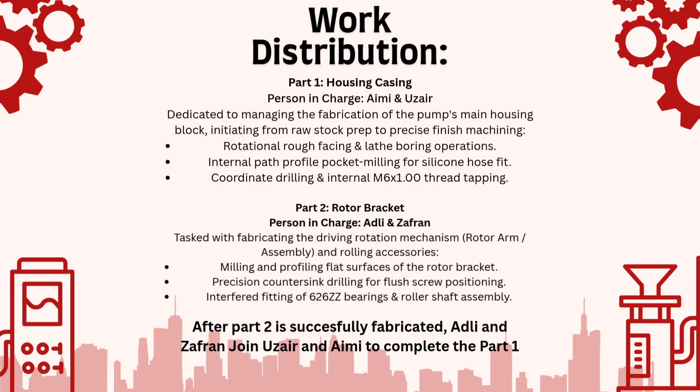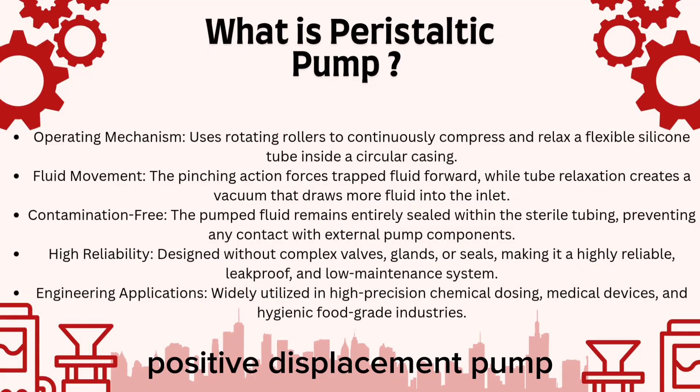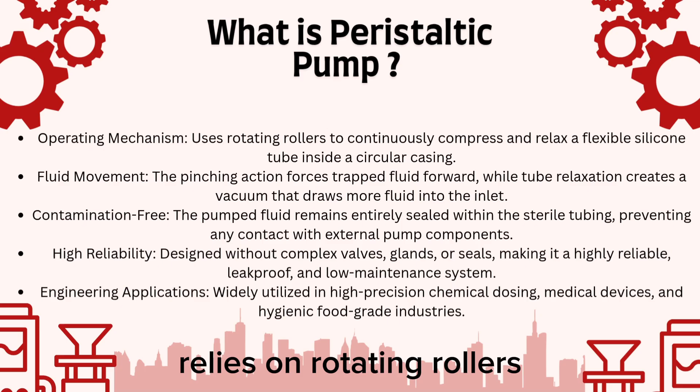What is a peristaltic pump? It is a highly efficient positive displacement pump designed to transfer various fluids safely through a flexible, specialized silicone tube. The operating mechanism relies on rotating rollers that continuously compress the tubing inside a circular casing.

As the rotor turns, the pinched portion of the tube forces the trapped fluid to move forward, while the subsequent relaxation of the tube creates a vacuum that draws more fluid into the inlet.

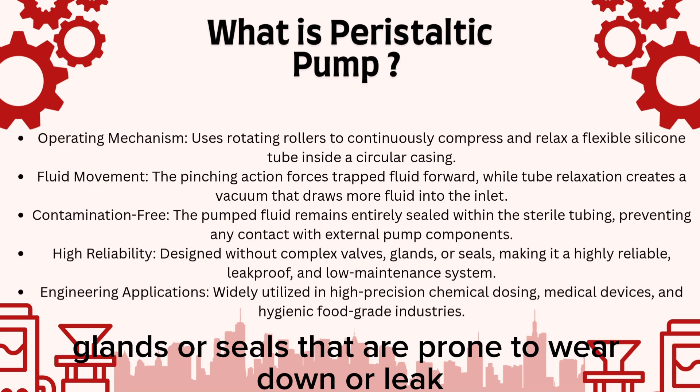The primary engineering advantage of this design is that the pumped fluid remains entirely contained within the sterile tubing, completely eliminating any risk of contamination between the fluid and the pump components. Additionally, because there are no complex valves, glands or seals prone to wear or leak, it represents a highly reliable, low maintenance system widely used in precision chemical dosing, medical device, and hygienic food grade applications.

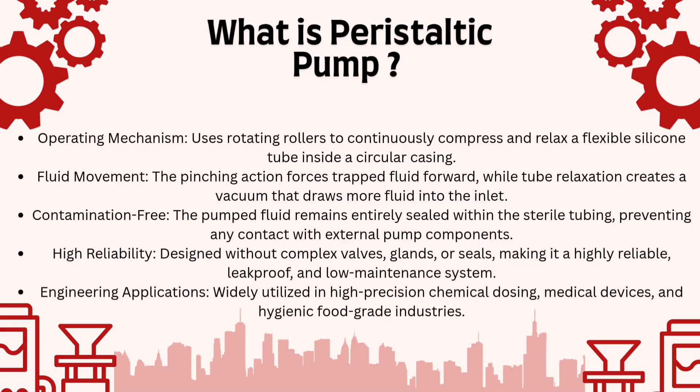Moving on to our project mission and learning objectives. This slide outlines exactly how we bridge theoretical engineering with hands-on workshop execution, focusing on 4 core competencies.

First, manufacturing planning. Our first objective is to take standard 2D engineering drawings and systematically convert them into a structured, step-by-step mechanical machining sequence. This ensures we have a clear operational roadmap before touching any machinery.

Next is physical fabrication. The ultimate mission here is to manufacture a highly precise, working physical pump assembly built entirely from mild steel raw stock. To achieve this, we will focus on skill integration.

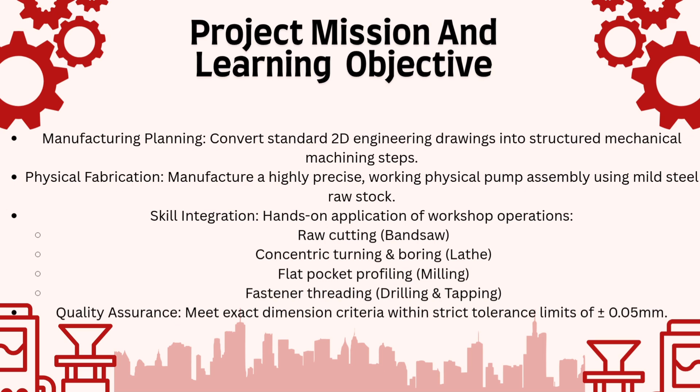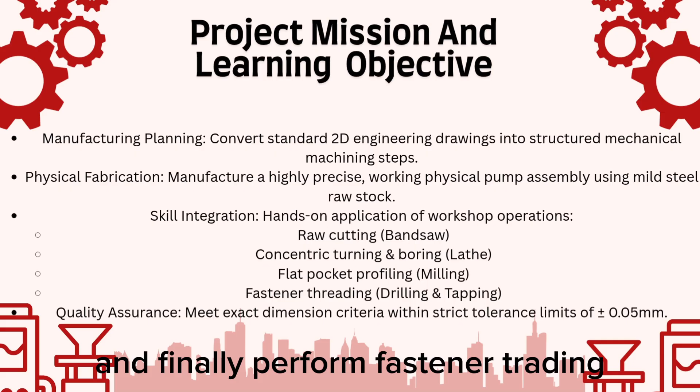This project requires the practical, hands-on application of several workshop operations. First, we start with raw cutting using a bandsaw. Then move to concentric turning and boring on the lathe to handle cylindrical geometries. We utilize the milling machine for flat pocket profiling, and finally perform fastener threading through precise drilling and tapping.

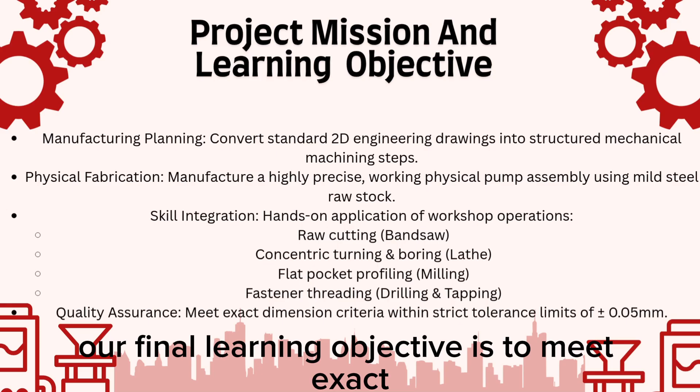Lastly, quality assurance. A working pump requires absolute precision. Therefore, our final learning objective is to meet exact dimensional criteria within a strict tolerance limit of plus or minus 0.05 millimeters. Alright, next, Zafran here, and I'll be explaining the safety equipment and techniques.

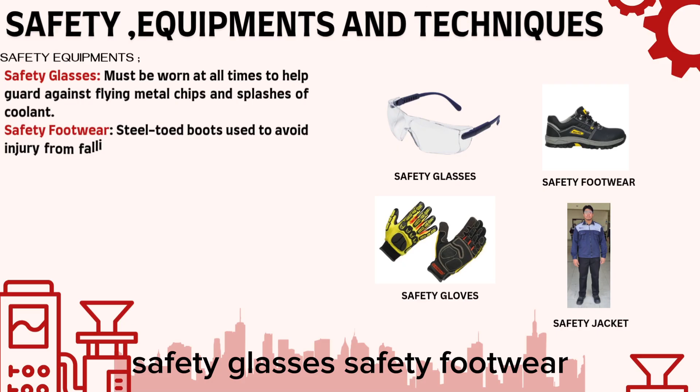For safety equipment, we have 4 items: safety glasses, safety footwear, safety jacket, and safety gloves. Safety glasses must be worn at all times to guard against flying metal chips and splashes of coolant. Safety footwear, steel-toed boots, are used to avoid injury from falling or heavy objects.

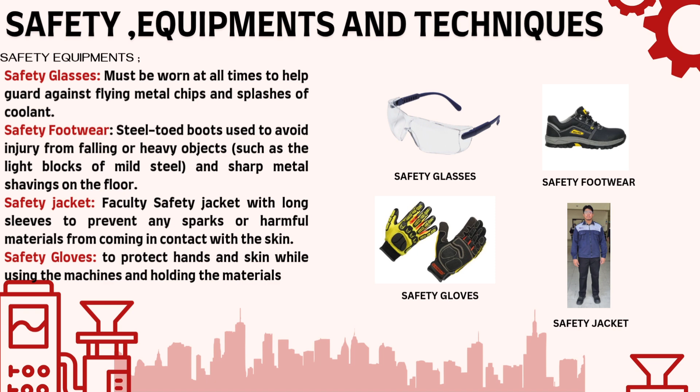Next, safety machining techniques. For lathe safety, always take off the chuck key after chucking the workpiece. The key can never be left in the chuck.

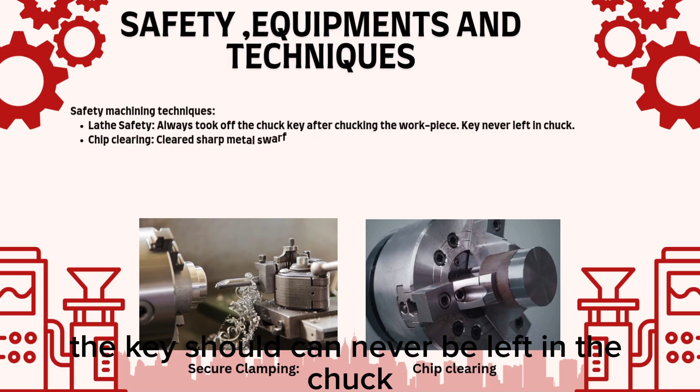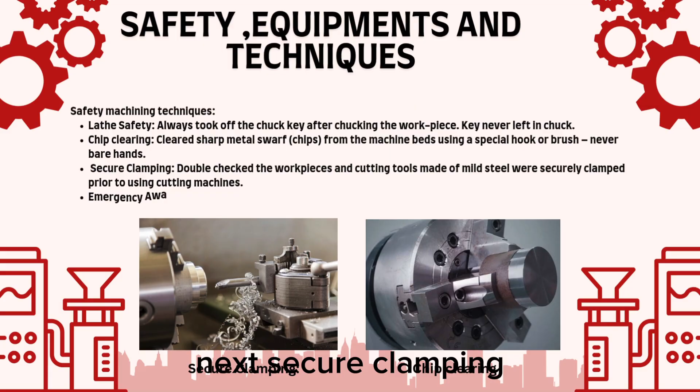Next, chip clearing. Clear sharp metal swarf chips from the machine beds using a special hook or brush. Never use your bare hands. Next, secure clamping: double check the workpieces and cutting tools made of mild steel were securely clamped prior to cutting.

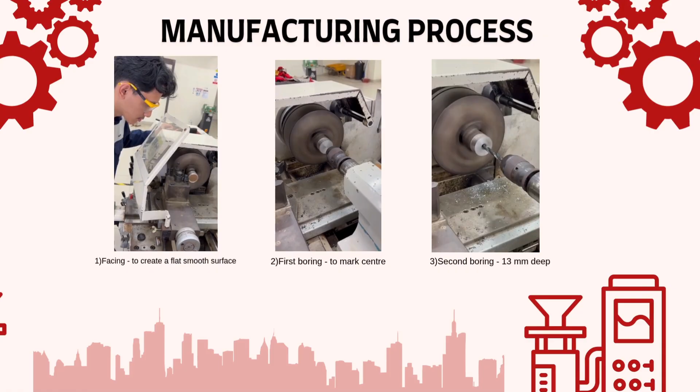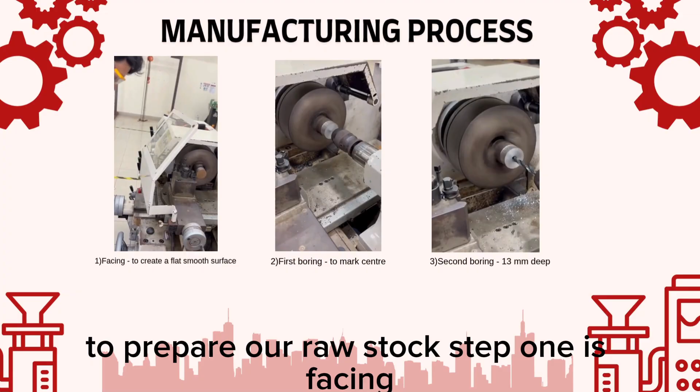Let's walk through the actual manufacturing process we execute on the lathe machine. The initial fabrication phase consists of 3 foundational steps to prepare our raw stock. Step 1 is facing. We begin by performing a facing operation.

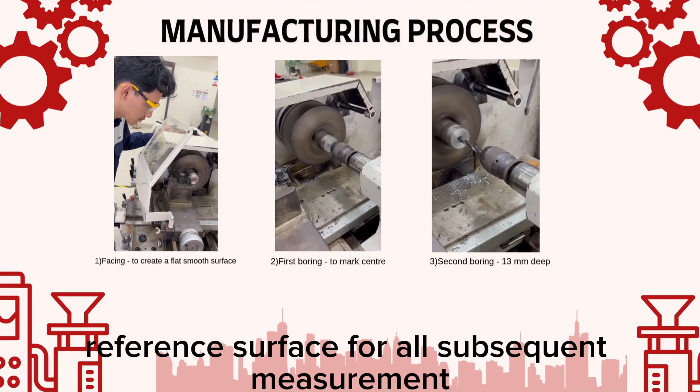The primary goal here was to clean up the uneven end of the raw stock and create a perfectly flat, smooth reference surface for all subsequent measurements. Step 2 is the first boring operation.

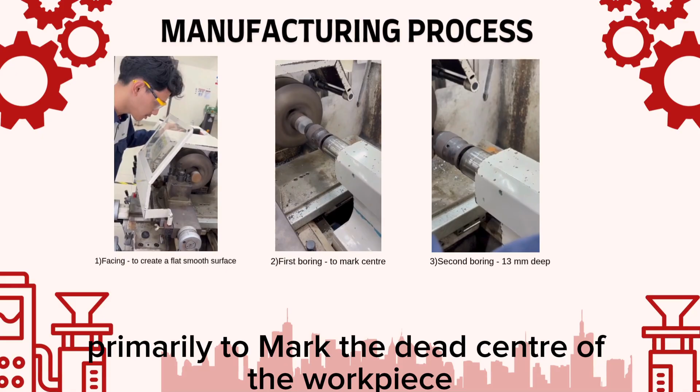Once the facing was through, we used an initial boring step primarily to mark the dead center of the workpiece. This acts as a critical guide to prevent any tool deflection later on.

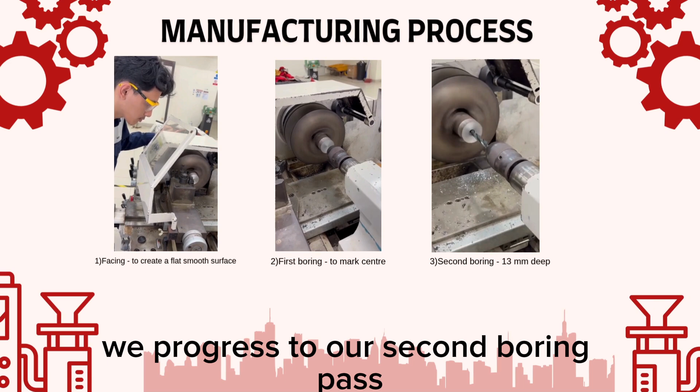Step 3 is the second boring operation. With the center securely marked, we progress to our second boring pass, machining into the workpiece to an exact depth of 13 millimeters.

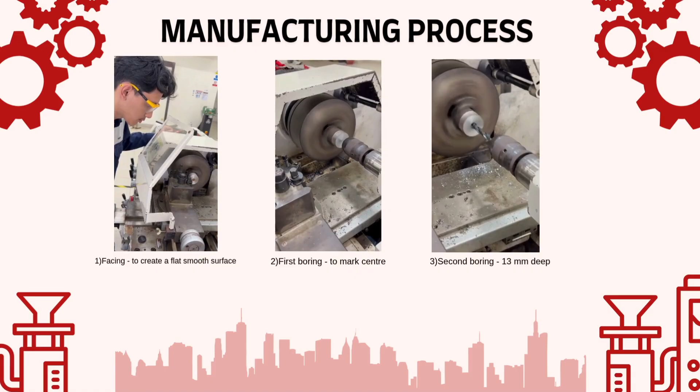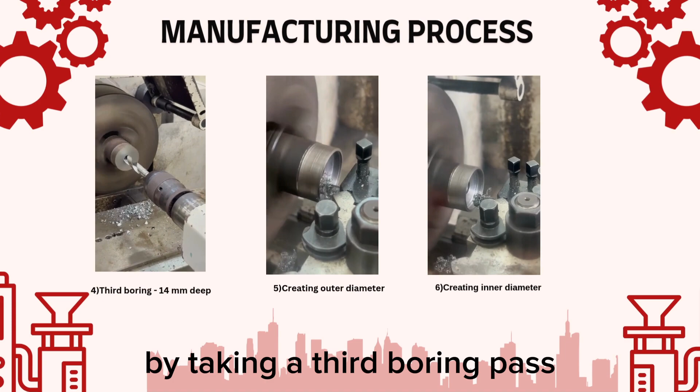Step 4 is the third boring operation. Here, we fine-tune our internal depth by taking a third boring pass, extending the internal cavity just slightly.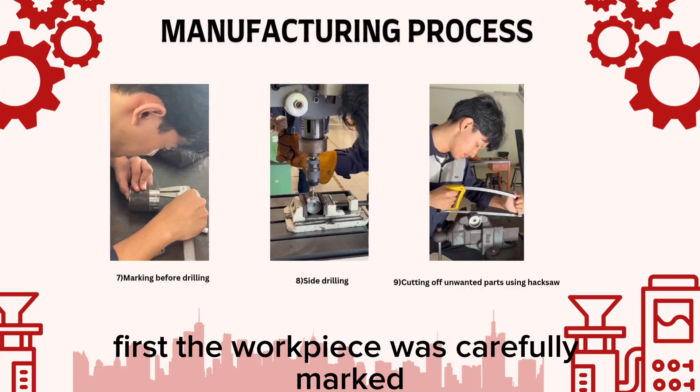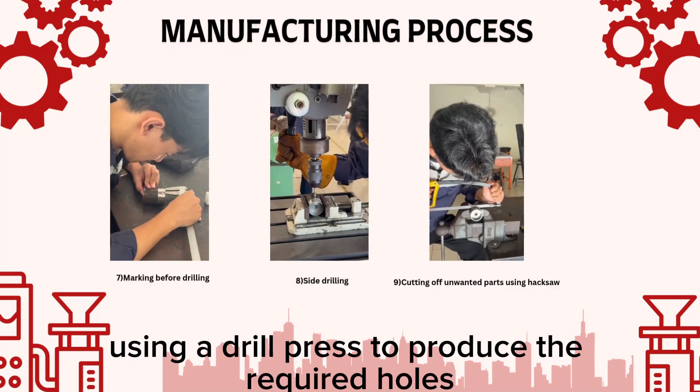After completing the initial machining process, we proceeded with the next manufacturing steps. First, the workpiece was carefully marked according to the dimensions in the design drawing to ensure accurate hole locations before drilling. Next, side drilling was carried out using a drill press to produce the required holes while maintaining proper alignment.

Finally, the unwanted portion of the material was removed using a hacksaw. This prepared the workpiece for the finishing operations in the following manufacturing stages.

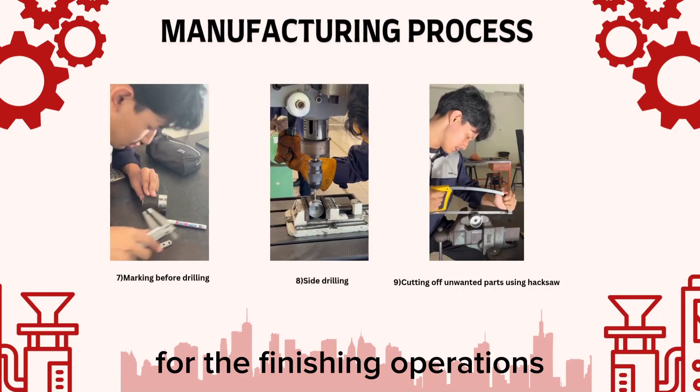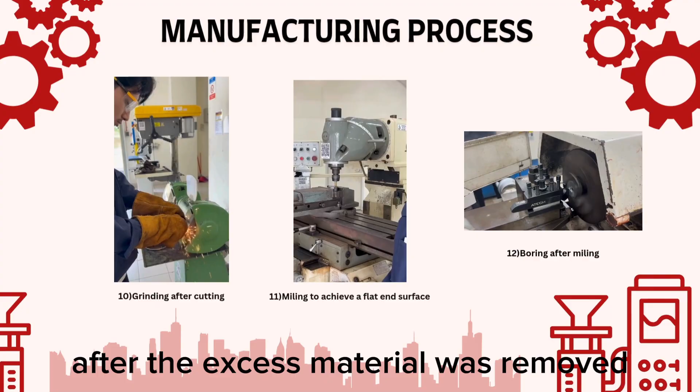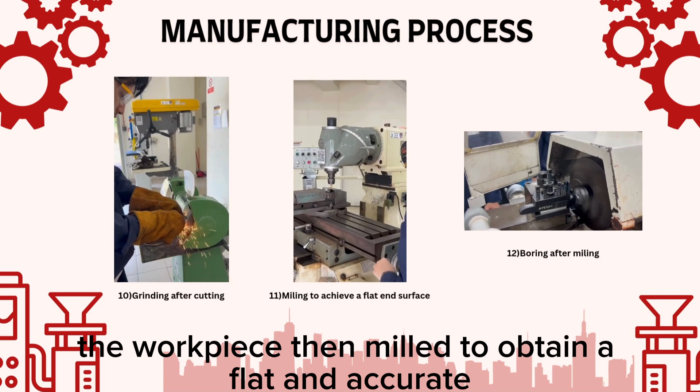After the excess material was removed, the cut surfaces were ground to eliminate burrs and sharp edges, resulting in a smoother finish. The workpiece was then milled to obtain a flat and accurate end surface that met the required dimensions.

Lastly, the boring process was performed to enlarge and accurately finish the internal hole to the specified diameter.

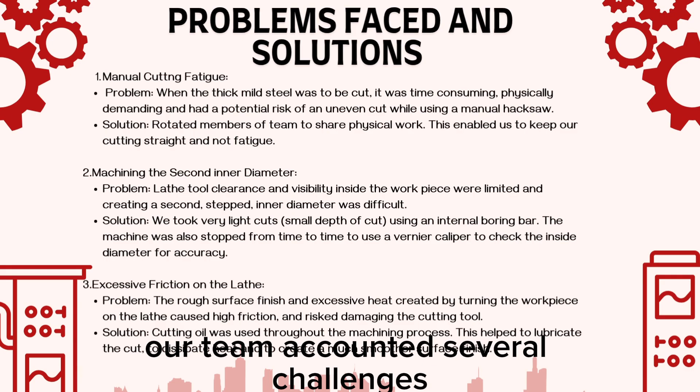During the manufacturing process, our team encountered several challenges. The first problem was manual cutting fatigue, because cutting thick mild steel with a hacksaw required a lot of physical effort and time. To overcome this, we rotated team members during the cutting process.

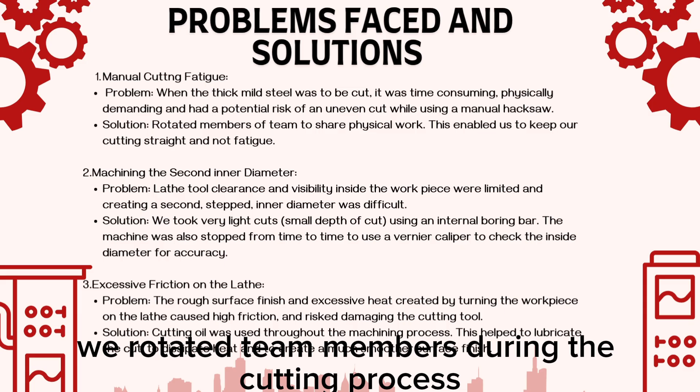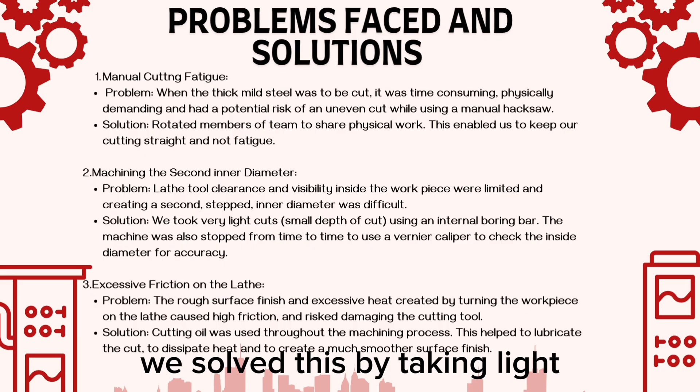The second challenge was machining the second inner diameter due to limited tool clearance inside the workpiece. We solved this by taking light cuts and frequently checking the diameter using a vernier caliper.

The third issue was excessive friction during the lathe operation, which caused heat generation and affected the surface finish. We used cutting oil throughout the machining process to reduce friction, cool the cutting tool, and improve the surface finish.

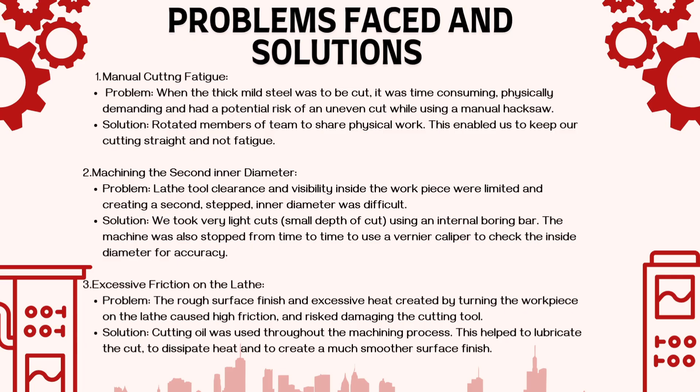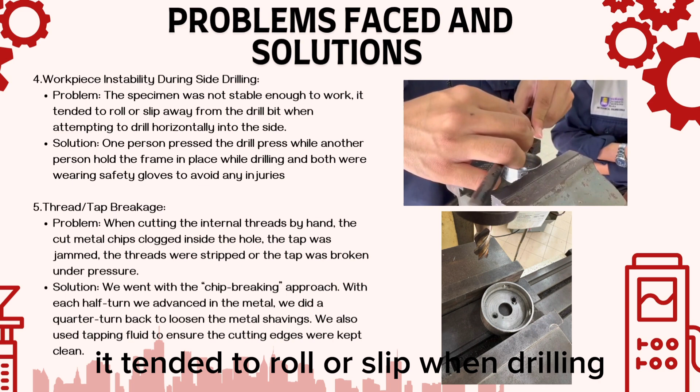The fourth problem we encountered was workpiece instability during side drilling. Since the specimen was not securely fixed, it tended to roll or slip when drilling horizontally into the side, which affected both safety and drilling accuracy.

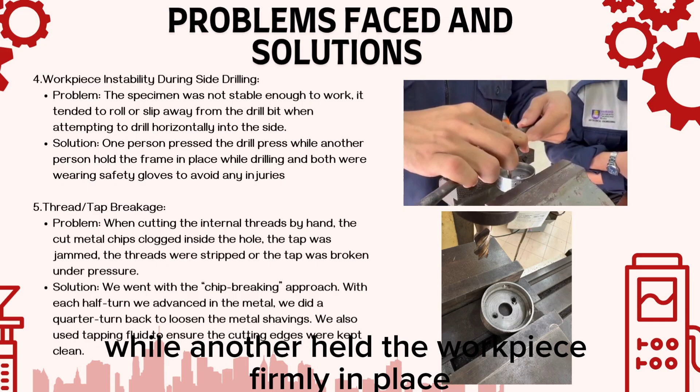To overcome this, one team member operated the drill press while another held the workpiece firmly in place. Both members wore safety gloves throughout. Finally, for discussions, we will be discussing the improvements that can be made.